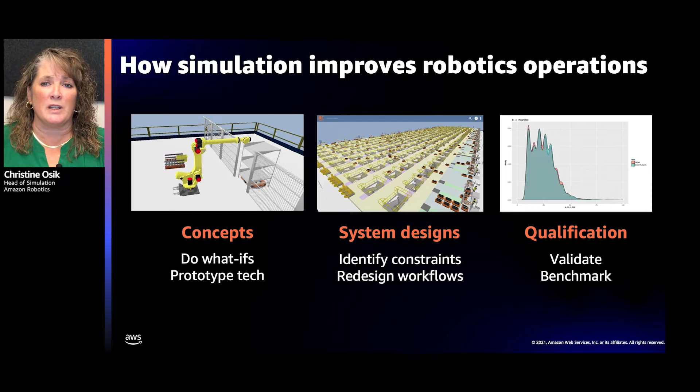That's really great, Christine. Three different types of simulations. I hadn't really realized that there were so many different ways in which simulations would be implemented.

What we'd like to do now is introduce 5 different use cases for how simulation will be used inside our Amazon development process. The first is using simulation to visualize how robots will work to non-roboticists. We'll then talk about how we use simulation to accelerate robotic solution delivery. Next, how simulation can accelerate development of new robotic perception or machine learning systems. The fourth and fifth are applications built on top of simulation, used to train machine learning models or optimize robotic configurations.

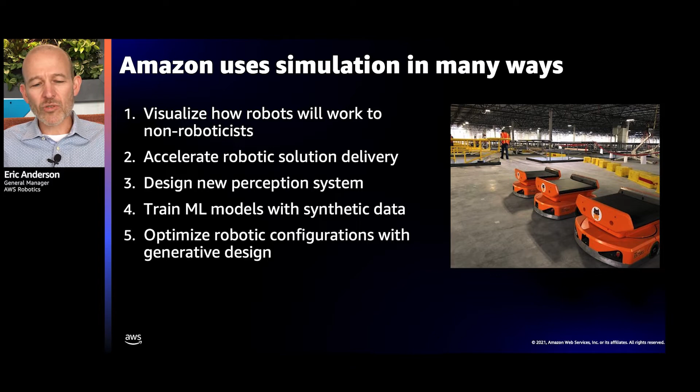In the early days of Amazon Robotics, when it was still a startup called Kiva, they were using simulation from the beginning. They used it to help design the systems and test the software, and modeled the inventory going through the system. They also used simulation to show customers who were unfamiliar with robotic systems how they worked, demonstrating the value of adding robotics to their operations. They obviously did very well, because Amazon saw the value in what they were doing.

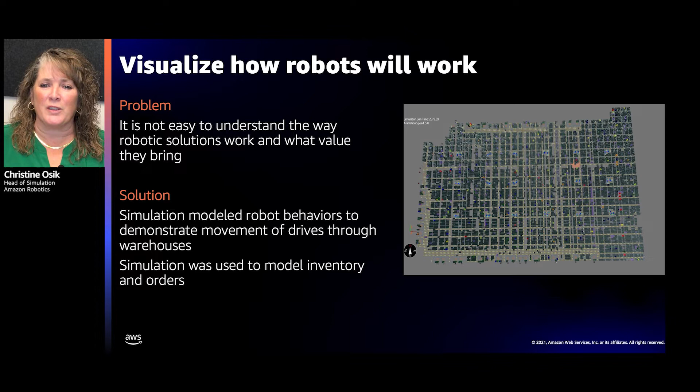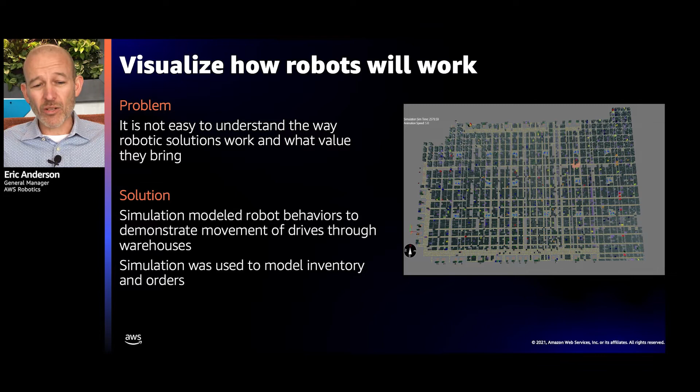That's a really great point. I talk to a lot of startups, Christine, that use simulation or can see how it could help them build their businesses. Robotics is often really hard to explain to a customer - what it does, how it works, how it will be implemented in a certain environment. I can absolutely see how a simulation like this could help visualize for a customer what they were going to get when they purchased a particular robotic solution. Really great point.

The next solution we'd like to talk about is how you can use simulation to accelerate robotic delivery. We were approached in Amazon Robotics several years ago by one of our senior executives with an idea: how do we turn a robot that looks like this into a robot that looks like that? It would be a completely different use case. Robotics at the time were primarily a fulfillment solution, where robots would pick up a cart or pod and bring it to a human to pick products. What we needed was a solution that would actually sort packages.

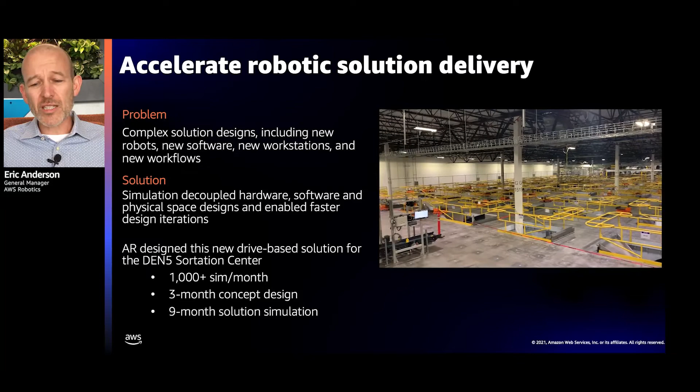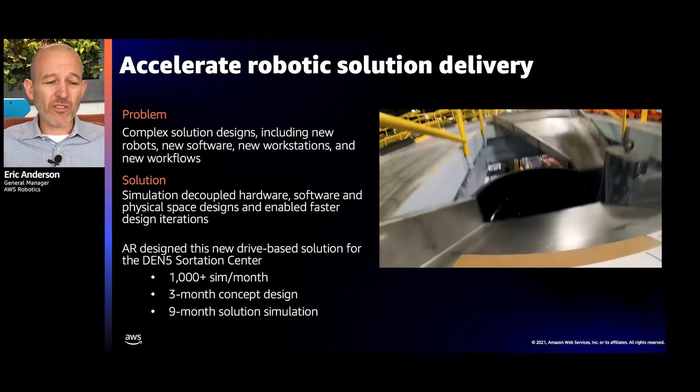So you can see here what we built was a series of simulations that allowed us to design the facility, design the workflows and the software, and put this into production at a much accelerated pace. Typically new robotic systems take more than 2 years; this application was delivered in about a year from start to finish, and it helped us operate through one of our busiest peak seasons in the first year it was open.

This was a great application. You can see here in these video images the 3D simulations that were built, and then the actual live building that went live later that year.

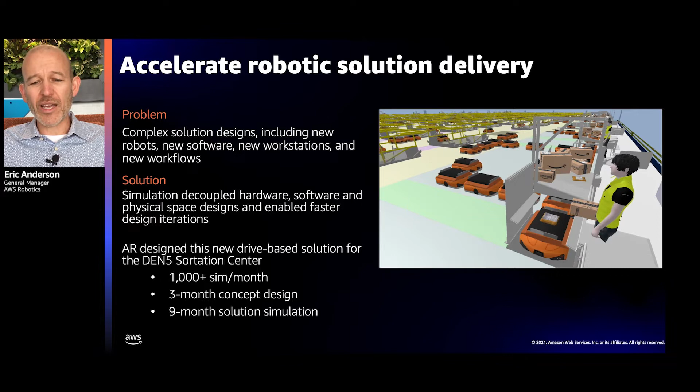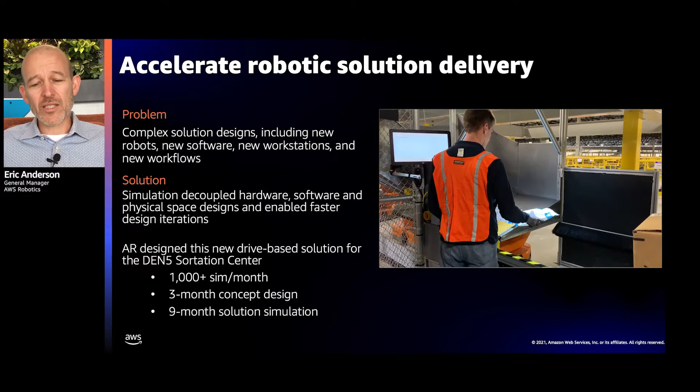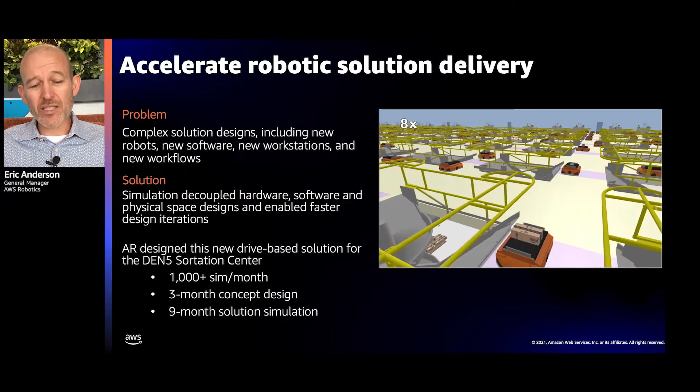To do this, we built 2 different simulation models: a conceptual design simulation, which helped us understand how the system would work end to end, and a series of solution design simulations, which actually designed the building, determined where chutes would be placed, and how the software algorithms would work - basically operating the entire building in a simulation environment, which allowed us to iterate and go much faster.

Yes Eric, that was so essential to that project that we now use simulation on every single delivery, from the concept phase all the way through delivery. It helps us adapt to changes in the design and deliver on time for our customers.

We also use simulation to help design new perception systems. Designing and testing these perception systems for autonomous robotics requires the physical world environment available to those robotics. We need to be able to simulate that for the sensor models to be able to train. We also simulate to see how these autonomous vehicles will operate in the environment, and how the drives work amongst each other - to see if, as they start moving around each other, they cause congestion, and how we can lay out the area they operate in better. So it's essential in autonomous robotics to have simulation for designing these perception systems.

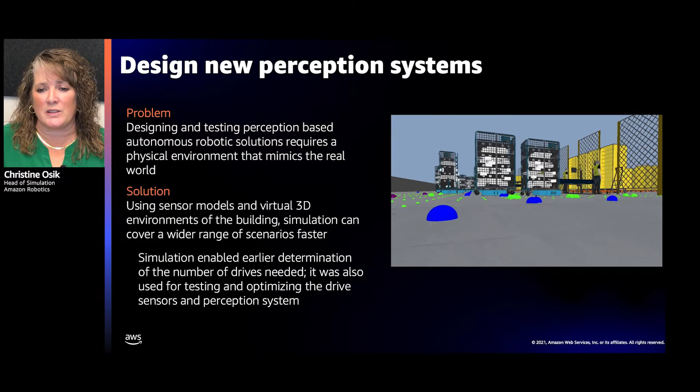That's really interesting, Christine.

We also use simulations to actually generate data that we then use in machine learning model training. Because simulations can be built in very high fidelity ways, meaning they very accurately represent the physical world in a virtual world, we can use 3D objects to generate images that can then be used to train machine learning perception models.

And because you're aware of the actual object and the location where it's at via the simulation engine, you can then put on top of it highly accurate labeled data. So you can generate your labeled objects, or your ground truth objects, from a synthetic model and be able to train your machine learning models much more quickly and much more accurately.

We use this within our applications, and we work with customers who are using this in their solutions as well, to use 3D objects to model rare or very complex scenarios. You can imagine even very highly random distributions of scenarios. We can generate randomized objects. You can change the size, the shape, the color, the texture programmatically, so you don't have to model all of those things in the real world.

And because this is a high fidelity simulation engine, you get very high fidelity images, meaning you're able to actually represent the same types of data in a virtual world that you would see in the physical world, which means your models that you train are going to be more accurate than what you can do with human labeled data.

That is an important use case. The other thing it's used for as well is to replay what happens in production. Once we have the data of what actually went through our facilities, we can use that synthetic data generator to recreate what was happening in the real world.

Another use case we have is to optimize robotic configurations with generative design. As Eric pointed out earlier, there's a lot of software and hardware involved in our robotic solutions, and both rely on maps for configuration and to operate in the buildings. We had this problem that we needed to solve - Amazon needed to increase the amount of product stored in the existing buildings. So we used simulation to automatically edit those maps and then run through simulations to see if we could increase the amount of storage without affecting the floor operations.

And it was very successful. We were able to produce better maps faster. They were actually better maps than we could manually create. And we had no impact to our floor operations.

You can see here in the picture that the drives are trying to dig out pods from that map. We were able to make those pod areas denser, which would require more dig outs for the drives, but simulation proved to us that we could do this without affecting our throughput. In fact, we actually gained some throughput from some of these changes. So simulation in the loop of automatic processes is another very valuable use case for us at Amazon Robotics.

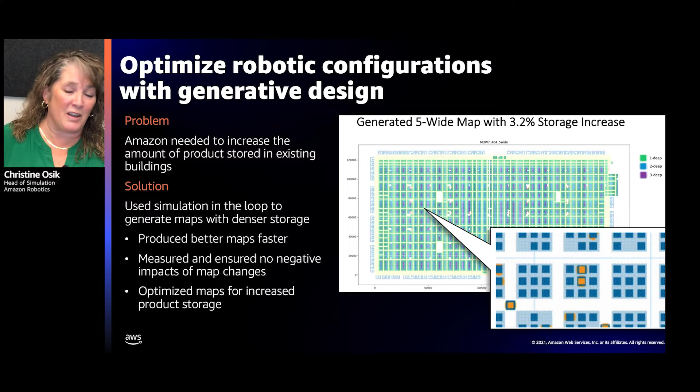That's really interesting, Christine. I have to imagine that one of the key components of how that solution worked is that you had the actual software running in the simulation model? Yes, we did, that is a good point. We have software in the loop in our simulation tools, and having that software in the loop enables us to test the software, but it also increases the fidelity of our simulations. Really interesting, really interesting.

So just to take some key learnings here from those use cases, I think to start off: don't make a guess, simulate. Simulation is an incredibly powerful tool that generates real data that you can use to make more informed decisions, accelerate the development of your robotic systems, and ultimately make a higher quality product.

And software in the loop is key. It helps increase the fidelity. It allows you to test the robotics and the software system at the same time with higher fidelity. And the next point is really fidelity, fidelity, fidelity. When you're building a simulation, the number one thing you have to be aware of is what is the fidelity of the simulation, and that should be guided by the type of decision that you're making from it.

It's totally okay to have a simulation that's considered low fidelity or not particularly accurate to real-world outcomes, as long as the decision you're making can be based on that level of data. If you need very fine-grained algorithmic tuning, or if you're training machine learning models, high fidelity simulations are going to be critical to make sure the outcomes you get are useful from the simulation environment.

Yes, and high fidelity models and simulations, we create them with software in the loop, and we can use them to help test the software as well. So you can embed these simulations into other applications and tools, and we do that to improve things in our worldwide operations network. It's really exciting stuff you're working on here, Christine.

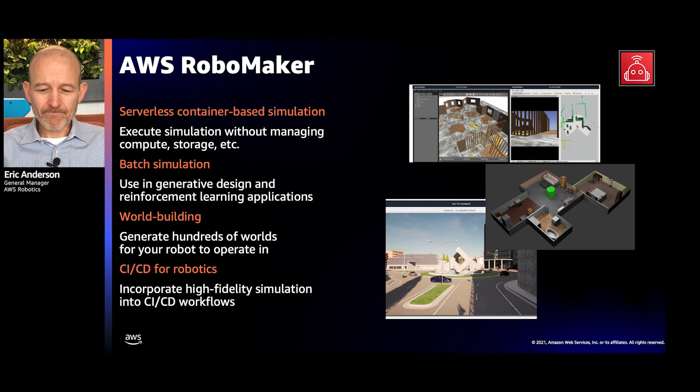We have a number of RoboMaker customers that have used RoboMaker to successfully deliver on their applications. Whether it's Milvus Robotics, which implemented a CI/CD pipeline to test robots in different environments, resulting in a huge quality improvement; JetBrain, which used simulation to expand and speed up the robotics development process; or Rumi, which used RoboMaker to save weeks on their development time and test prototypes in real-world scenarios.

It's best to think of simulation as a series of activities you engage in: whether you're deciding on what test scenarios to build, what level of simulation fidelity you need, whether you need help building your robot, your application, or your simulation application, designing and building out your simulation world in which a robot is going to operate, or even defining test cases. We can help and advise you through all of these.

We've been involved in simulation for years building out RoboMaker, but we have our partners in Amazon Robotics that we work with on a regular basis, to make sure we can bring the best practices of simulation development to you as well.